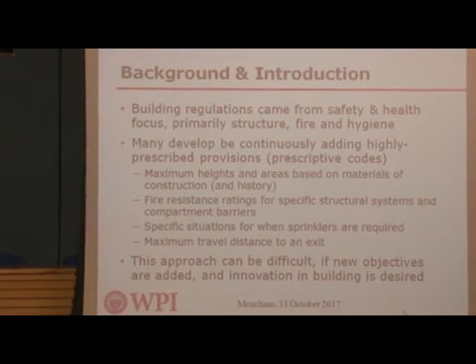So building regulation and fire regulation generally has developed out of the health and safety area because we were very good at burning down cities 100 years ago. So somebody decided maybe we should put in some regulations to try to control for that. And so we instituted a number of measures like limiting the heights of buildings, the areas, compartment size, try to make access easy for the fire service, define how large compartments should be, fire resistance, and we kept adding all of this regulation, and we very much specified everything that needed to occur.

The problem is, in many countries, not all buildings fit that very tight prescription, and it can be difficult to innovate in the design when the regulations are very restrictive. So starting around 1980, there was a movement to transition to what they call performance-based codes. And the idea here is that the regulation focuses on the societal goals like safety in case of fire.

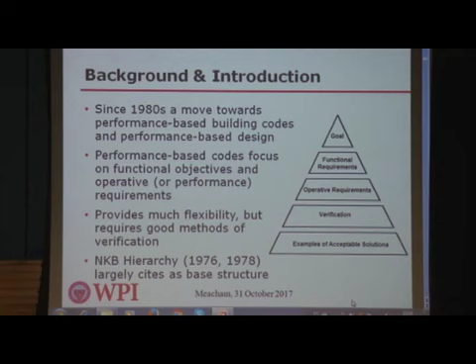You define a functional requirement, something like provide adequate means of escape given the fire protection systems in the building, and then you put operative requirements such that the fire safety systems in the building shall be designed to maintain a tenable environment for the time that it takes people to evacuate. So very clear statements of purpose with some criteria that you're trying to judge, and then you have means to verify through engineering analysis, but then you also have examples of acceptable solutions, which in many cases are what used to be or are still called the prescriptive codes.

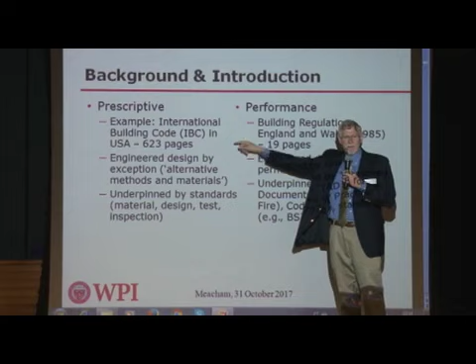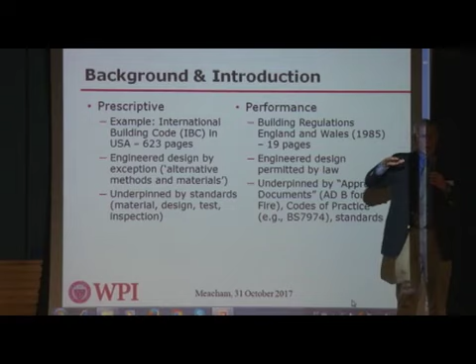And you can see a difference, for example, in the United States, the International Building Code is very prescriptive, 623 pages of text to tell you exactly how many meters to an exit, what the fire resistance is, and it works very well if the building looks like a square box no higher than 4 stories. But with very unique designs, it's very difficult. In England and Wales, the regulation is only 19 pages. It basically just tells you that make the building safe. And so we can do engineered design by exception in the US, but in the UK, it's permitted by law.

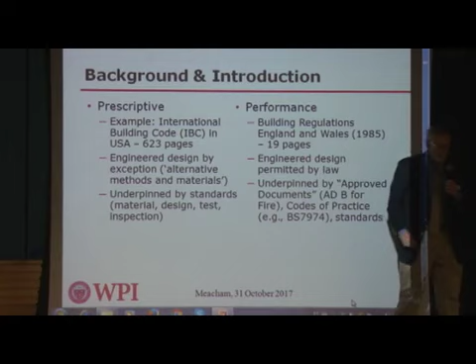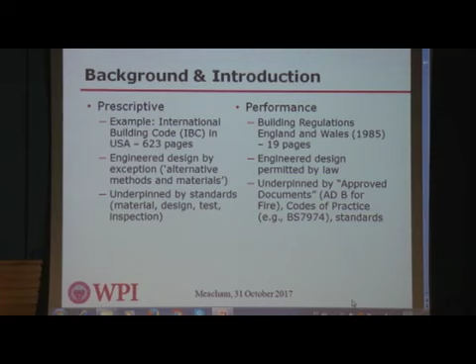And so both sets of regulations are very much underpinned by clear standards for testing of materials, design, and so forth. But it's really an issue of, do you start from telling everybody exactly what they have to do and then allow exceptions, or allow people to do whatever they want and have most people default to the very specific guidance anyway? So that's really kind of the difference between a prescriptive-based system and a performance-based system.

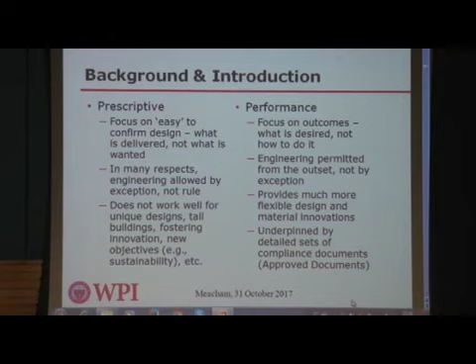And so I say the prescriptive is very good for the regulators because it's easy to determine by looking at the drawings if the design complies with the regulation. And they allow engineering, but it's by exception, and it's a little bit difficult if you want to do a very unique design because not all buildings look like a box. Performance focuses on what you're trying to achieve with the building, not specifically how you do that, and it gives the engineer and the architect more flexibility, but it's very difficult for regulators and the fire service to determine, did the design actually achieve the objectives? So each system has benefits and detriments.

So for the past 2 years, I've been going around the world looking at how, in particular, the performance-based building regulatory systems have been working in 7 different countries. And I've been talking to regulators, fire service, architects, engineers, trying to really get a sense of what is working and what is not working, and what we might want to look at differently into the future. So I'll go through a few of the countries briefly.

I know time is short, so if I start going long, somebody can start waving at me and say stop.

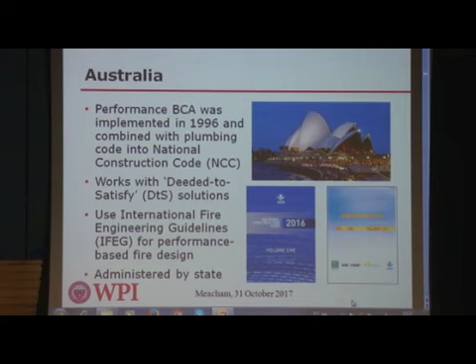But to start with, Australia has the Building Code of Australia, which was implemented in 1996, and that's a performance-based document. And they have this combination of goals and objectives, but they also have a very prescriptive deemed-to-satisfy component. And if you're going to do engineering analysis, they have this document, the International Fire Engineering Guidelines, which lays out a process for how you identify the objectives of the building, how you develop fire scenarios, quantify design fires, conduct analysis for smoke and fire spread, and they even have a fire brigade response model within that International Fire Engineering Guidelines.

So within Australia, fire safety engineers are required for design, but they're only required to be licensed by law in one state. And so this makes it a little bit challenging, because if you don't have the legal infrastructure to define what competencies the engineer should have, that can allow for bad practice in reality.

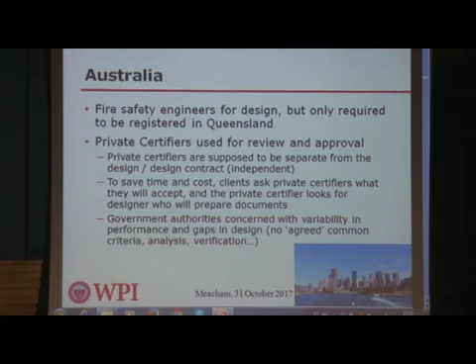Another issue that Australia has is that they allow the use of private certifiers. This means that the government doesn't do the approval like City Hall. A private entity can be contracted to conduct the review and certify the building. In theory, the idea was that it would reduce the cost. In practice, if it's an unethical reviewer, they can pick design engineers that they want to and actually not do a very good design or an appropriate review. So you have to be really careful when you do private certification, because the oversight and the ethics need to be very high.

So we saw earlier a picture of the Grenfell Tower in London that happened just this year. But 3 years ago in Melbourne, Australia, there was the Lacrosse building fire, which had the same combustible exterior facade. They were lucky that no people died in that fire, but the Victoria Building Commission did an audit of 151 buildings and found that 51% did not comply with the building regulations. And they saw this as a potential issue with the private certification and what could happen if you're not careful about having good oversight.

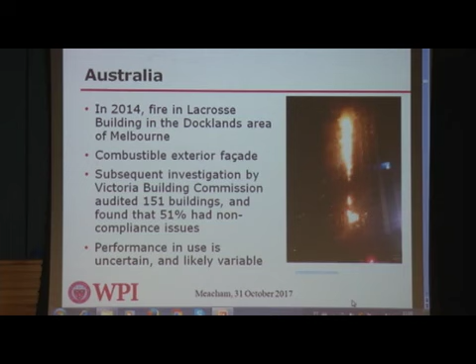So as a result, now, following Grenfell, all across Australia, there's a review of all tall buildings and any buildings with combustible facade, but also trying to determine what is the real expected fire safety performance of the buildings. And the fire safety engineers recognize this, and there's a few comments here.

I hope you'll get the slides so you don't have to try to read everything.

But the engineers recognize that there's no regulations to require building owners to maintain their buildings, to require annual inspections, to make sure that the fire safety management is correct. And so that's an important issue, that you can do a very good design as an architect or engineer, but if the building owner doesn't maintain the building according to the design, then you have no guarantee of the performance expectation.

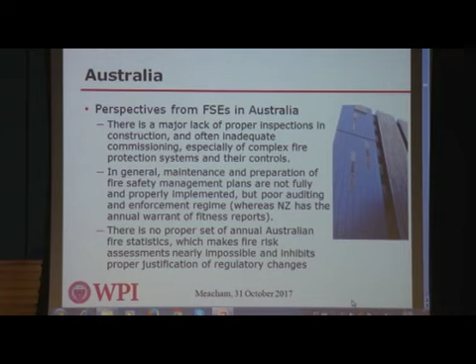Also, Australia does not have a good set of fire statistics. The fire brigade stopped reporting statistics about 10 years ago. It's very difficult to really understand how large the fire safety problem is or what the particular components are without good statistics. So this is something that should change, and in Brazil or any country, you want to know what's happening, because when you have the data, you know where to focus your resources.

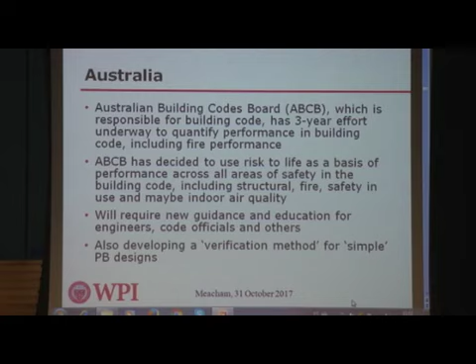So the Australian Building Codes Board, moving forward, is changing their building code. They're keeping it performance-based, but they're setting a single metric of risk to life as the basis for performance. And in the future, fire safety engineers will have to demonstrate that they're not exceeding a particular risk to life level with the combination of materials that they put in the building, and the building owners will have to follow that as well.

So I'll switch now to New Zealand. New Zealand has had a performance-based building regulation since 1992. They also have these fire engineering guidelines, but also recently they developed a verification method which has more detail for fire safety engineers and for reviewers to follow.

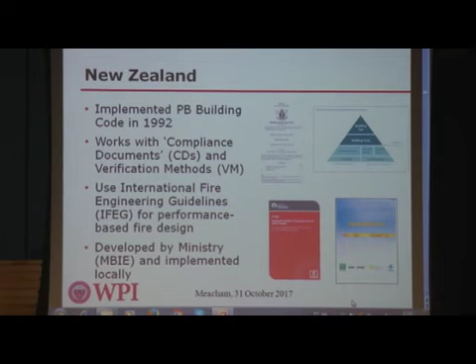So just a little bit of background. In the early 2000s, New Zealand had a very big problem with moisture control in buildings. They had a lot of moisture coming through the exterior facade, causing rot within a lot of the timber construction. That led to about a $2 billion impact on the New Zealand market.

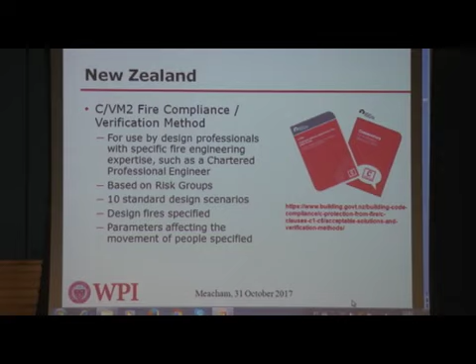So the government changed the regulations and really wanted to focus on better quantification of performance, licensing of professionals, audits of the regulatory authorities, and more to try to get some oversight. As part of this change to more quantification, they developed a fire verification method, based on different risk groups and different building uses, but has defined fire scenarios that the engineer has to use, a defined fire size, and even very specific modeling parameters.

And if you're in an industrial facility, you have to use a 50 megawatt fire. The reason for this is that you're testing the performance of the building and your fire safety design. If you use too small of a fire, you don't get an indication of what could happen if those systems fail.

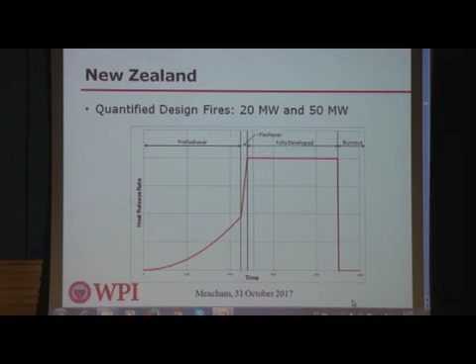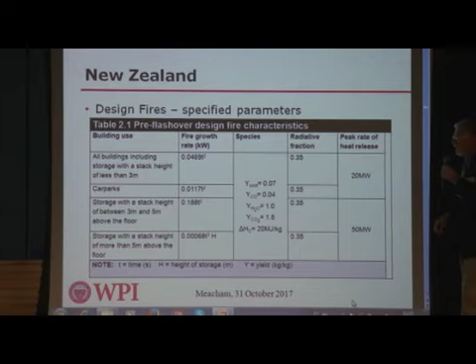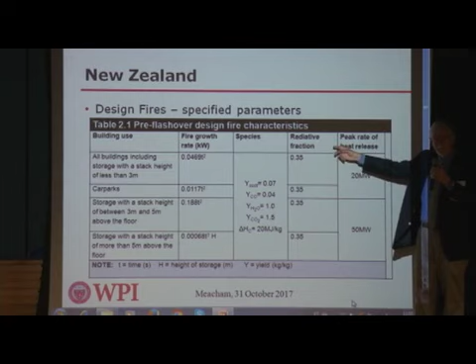Fire safety engineering design also uses quite a bit of computational fire modeling these days. So this design guide is also telling you what the fire growth rate should be, the production of things such as carbon monoxide, carbon dioxide, soot when you're predicting the smoke movement, even things like the radiative fraction, which impact burning rate, and again, the heat release rate.

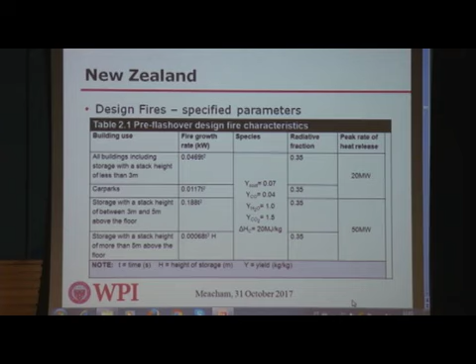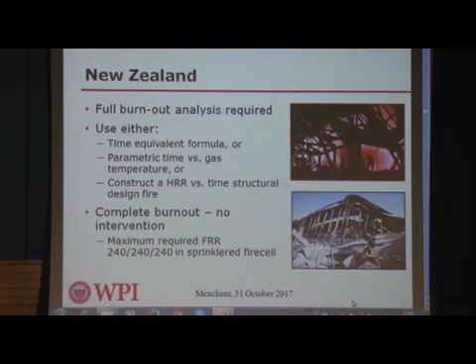So the idea is to be very specific on the load that the building is expected to withstand in the case of fire. For structural analysis, you have to do a full building burnout, showing that the building will withstand the fire based on the analysis, or you have to default to basically a 4-hour fire resistance construction. So it's really intended to put a lot of control in place.

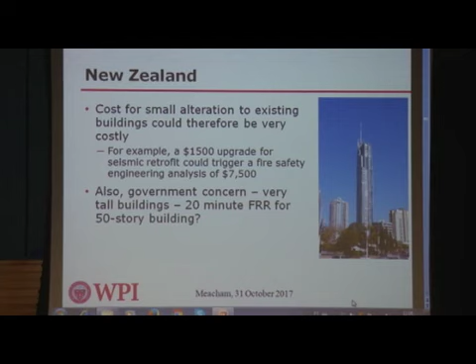Now, some of the industry thought it was too much control, and they pushed back a little bit. So the government has modified it to the point where the verification method is used for most buildings, but if you have a truly unique design, you can do fire engineering from first principles, though it's a much higher review process that you have to go through. They also had some issues with tall buildings, but I'll talk about tall buildings more this afternoon.

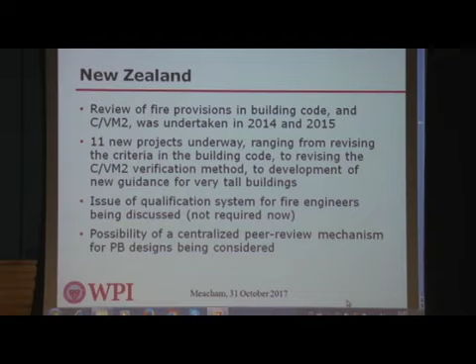So one of the other attributes - the government is doing a lot of work to try to address some of these concerns - but similar to Australia, there's no requirement for a specific fire engineering qualification. They see this as a problem because anybody can call themselves a fire engineer, and the market generally doesn't know how to assess qualifications, so they can get a bad designer. This lack of qualifications is a problem in New Zealand as well as Australia, and they're looking at mechanisms such as licensing, but also a central review body with qualified experts to look at some of these very unique designs to make sure the quality control is much higher.

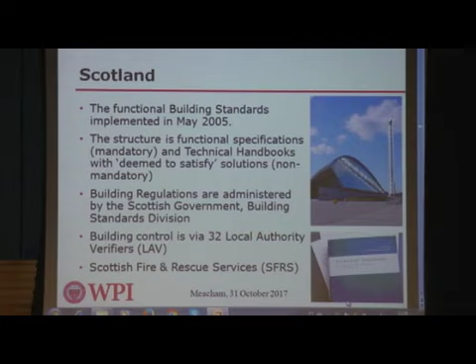Moving on to Scotland. Scotland has what they call a functional building regulatory system, which is essentially the same as performance-based regulation, where they have functional statements in the regulation, and then they have technical handbooks, which are more or less the prescriptive, deemed to comply type of documents.

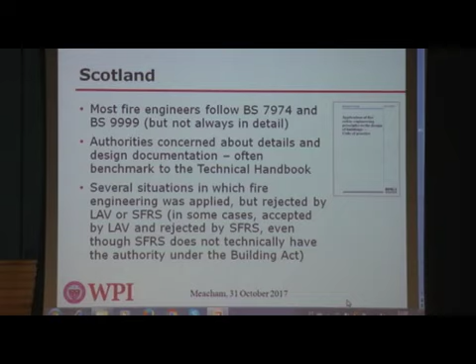For fire engineering analysis, most engineers follow British standards, so BS 7974 and BS 9999. Part of the problem is that BS 7974, in its 8 parts, is very detailed, which is very good. But the authorities are finding that many engineers are not following the guidance in total. They write a statement saying they followed the principles of BS 7974, but when the fire services and building authorities review the design, not all the components are there. So it's really not appropriate to say you're following a specific standard or guidance if you're not following it in total, because it's there as a package to make sure everything works appropriately.

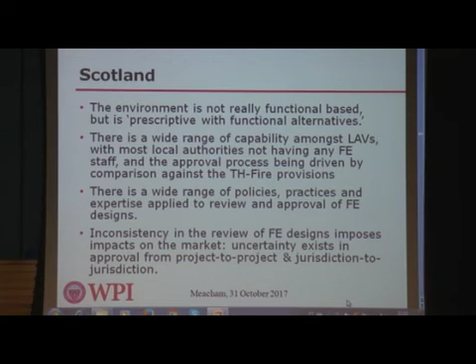So there is some concern that even though the regulatory system is functional or performance-based, it's really being interpreted as prescriptive. Part of this is because local authorities look to the technical handbooks as the first base instead of allowing the engineered design, because they don't fully trust the engineers. So they make the engineers demonstrate the differences to the technical handbooks. Here again, we have this challenge with the qualifications of the engineers, but there's also an issue with having appropriate qualifications for the people reviewing and approving the designs—they need to be at that same level to have confidence that the design is actually meeting the objectives.

So Scotland right now, as a result of some work I did a year ago, is looking at developing a qualification system both for engineers and for local authority verifiers. It's probably going to follow the Institution of Fire Engineers Chartered Engineer status, both for the engineer and the reviewer. But in England and Scotland now, even though you can become a chartered engineer, it's not required by law, and that's the big difference. If a client doesn't understand how to recognize the benefits of a chartered engineer, they may just hire somebody that has inappropriate qualifications.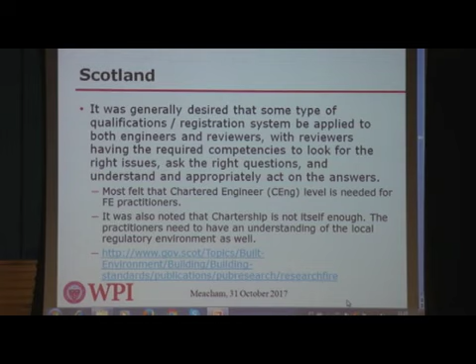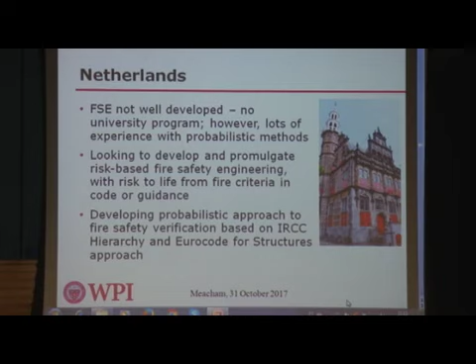The Netherlands has had a performance building code since 1992. They have a large focus on developing innovative solutions, but unfortunately fire safety engineering is not very well developed—there are no university programs in fire safety engineering. They have a lot in civil engineering, since they have this big challenge of keeping the ocean from flooding their country. So the civil engineers are very strong and have done a lot of work with probabilistic methods. Now the fire safety engineers are thinking, because we have all this knowledge on probabilistic design due to flood, can we bring that in to have a probabilistic design for fire safety?

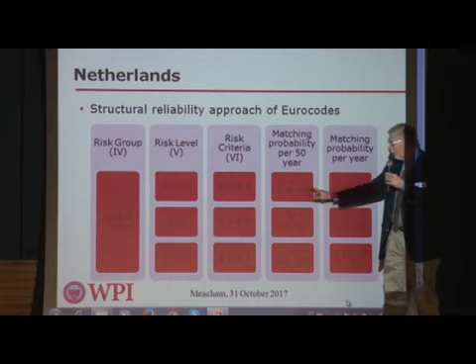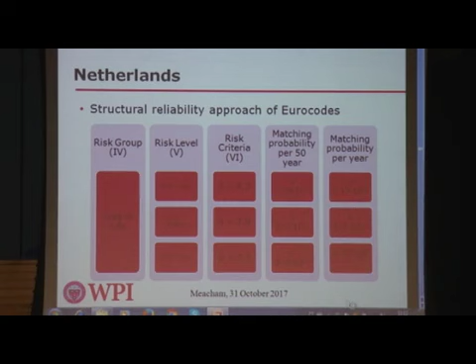So where other countries use more of a deterministic or process approach, in the Netherlands they're looking at following more of a structural reliability or probabilistic approach to design, where the objective focuses on life safety. You have three different risk levels for buildings, and you have a probability of occurrence of event and safety to life that would be the guidelines for the design. This is the current approach they're developing. I'm not so sure they'll implement it anytime soon, but it's a rather interesting approach.

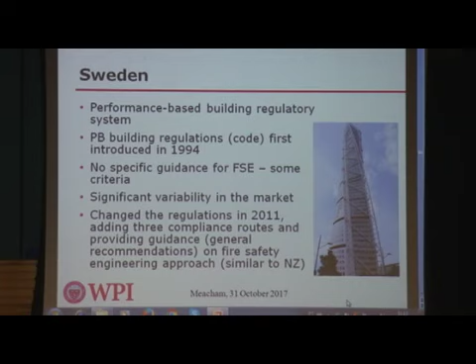Sweden has had a performance-based system since 1994, and with their initial regulations it was very open—it didn't have much guidance, and that caused a lot of problems in the market because there were different interpretations by engineers, regulators, and others. So in 2011, Sweden changed their building regulation and put more specific requirements on design fires as well as acceptance criteria, very similar to what New Zealand did.

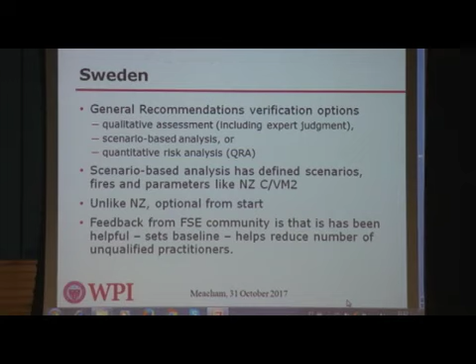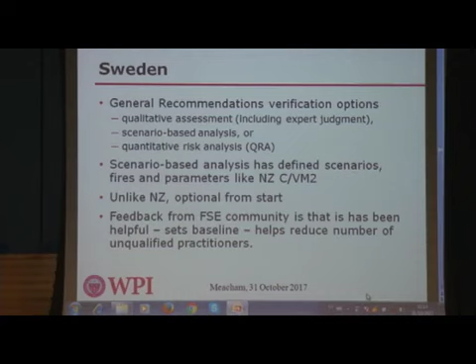There's a document called the General Recommendations, which deals with verification of design, and there are three approaches they allow: a qualitative assessment if it's a very minor design, a scenario-based analysis similar to New Zealand, or a quantitative risk analysis. I'll just talk a little bit about the scenario-based approach. Similar to New Zealand, it gives you fire growth rates that the engineer has to use, heat release rates, and fire load, so you can look at the initial stage, fully burning, and post-flashover fire.

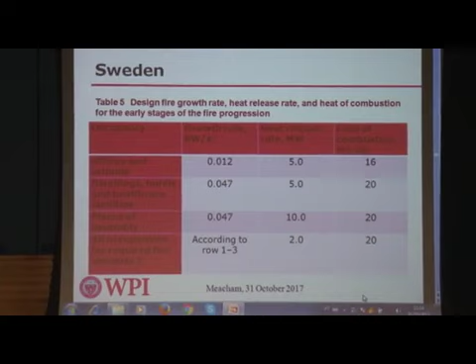What's interesting here is that the heat release rate is 5 megawatts. If you remember, it was 20 megawatts in New Zealand. So there's a different philosophy in terms of what the size of the fire should be for testing the building. If you look to develop a design guide, that would be one of the big factors that needs to be looked at.

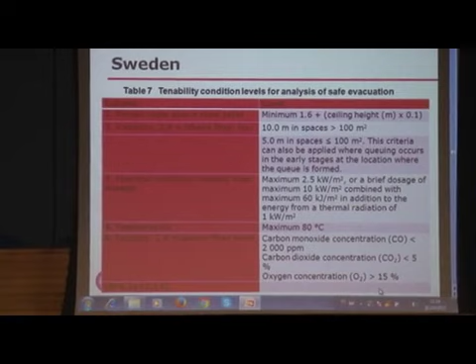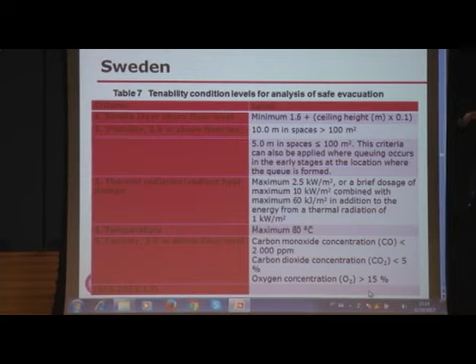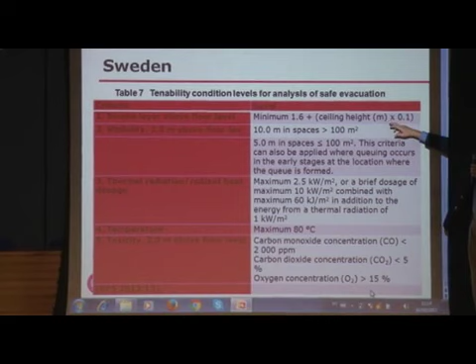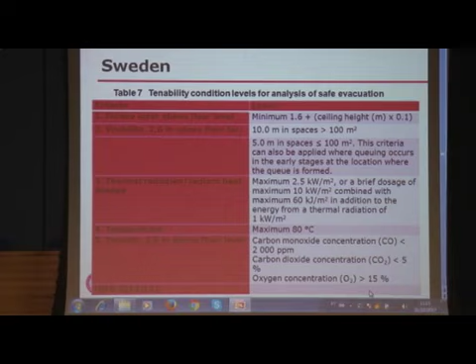Here's an example of some of the criteria they use. There's a defined smoke layer above the floor—you have to have at least 1.6 meters of clear height, plus 0.1 of the height of the ceiling, so as the ceiling height adjusts, that level adjusts. There are different visibility requirements: 10 meters in a large space, 5 meters in a smaller space, maximum radiant heat flux that people would feel on their skin, and things like that. But it's very good if you're going to do modeling, to be able to demonstrate what you think the fire is actually going to do in terms of impacting people as well as impacting the building.

So some of the observations from the engineers were that the change in guidance has been very helpful, but they see another problem. Sweden has a very long history of fire safety education—Lund University has been graduating fire safety engineers for about 25 years.

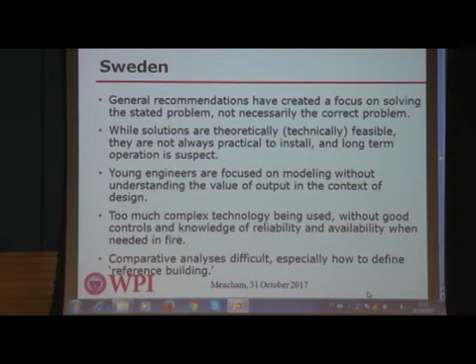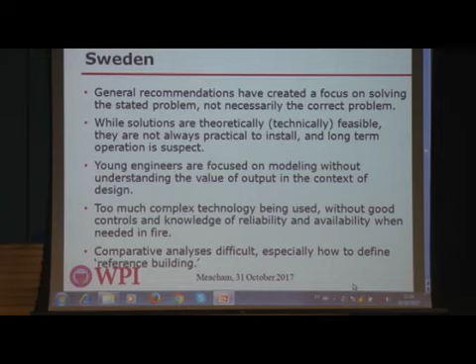So the problem that some of the engineers, particularly the older engineers, are seeing is that the young engineers are very good with computer modeling, but they have no idea how to engineer a good design. They're used to computers because they play computer games, but they don't understand how to interpret the output in relation to what makes a reasonable design, and they come up with impractical designs. So here's a case where technology, which can be very helpful if not properly applied, can end up with a design that's even worse. So there needs to be some controls.

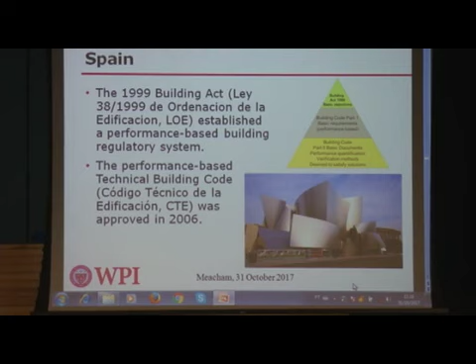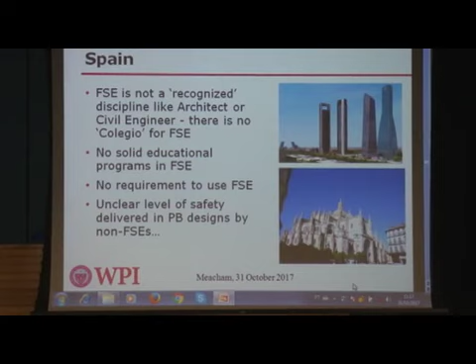Briefly on Spain, they have a performance building code as well. The Building Act was initiated in 1999, and the technical building code was published in 2006. A problem there, which as I understand is a similar challenge here, is that fire safety engineering is not recognized like architecture or civil engineering. There are no fire safety engineering programs, and there's no requirement to use fire safety engineering. So they implemented a performance regulation, but they didn't have any fire safety engineers qualified to do it. So it's a rather mixed up kind of place.

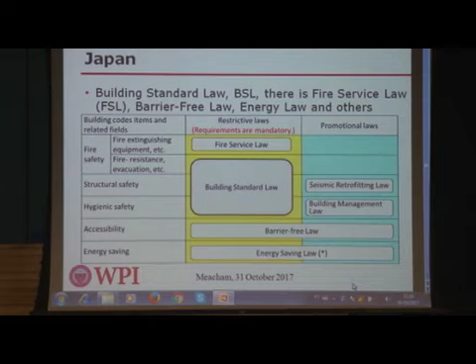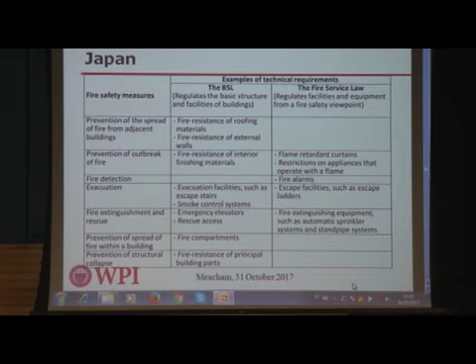Then briefly on Japan. Japan is different from the other countries I looked at in that they have separate building regulation and fire regulation: the building standard law and the fire service law. The fire safety requirements are split between the two regulations. In the building standard law, you get things such as structural safety in case of fire and evacuation. The fire service law deals with active systems such as sprinklers and detection systems. So that requires a lot of coordination between the building regulators and the fire service, because you have to look at both sets of regulations depending on what aspect of building fire safety you're controlling for. If you're dealing with fire resistance, smoke control, and evacuation, that's building standards law. If you're talking about sprinkler systems, detection, communication, and fire service support systems, that's the fire service law. So in a design, all of that has to be very well coordinated, which doesn't always work.

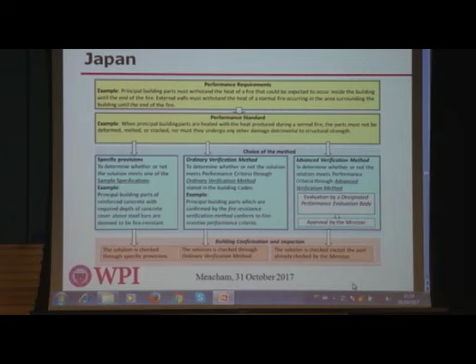The other aspect about Japan is that they have 3 different methods for verification. One is that you can just follow the prescriptive option in the code. The second is what's called the ordinary verification method, which has very specific relationships between smoke filling and evacuation, or specific requirements for structural engineering design. Or you could go to a full performance-based design. If you take that last route, you have to submit your design to a panel of experts, put together through the ministry and approved bodies, who will do a complete review of the design. That panel is typically academics and researchers.

So a short summary of Japan: they have a performance code, and what I call the medium level verification method, but that's all based on kind of 2-zone models and simple equations. If you want to do a full performance design, you have to get ministerial approval, but it's difficult to get that approval. So there are a variety of challenges, and with that long time to approval, fewer people do the full performance design because of the uncertainty in the end.

I know I'm going quickly, but I'm trying to get everything in here a little bit. One other thing I did after going to the countries was to post a survey online through SurveyMonkey. I asked engineers around the world - I had a few engineers respond from Brazil, and 400 respondents in total. Most of the people were from Australia, New Zealand, Sweden, Scotland, the US, and Spain, because those were the countries I visited.

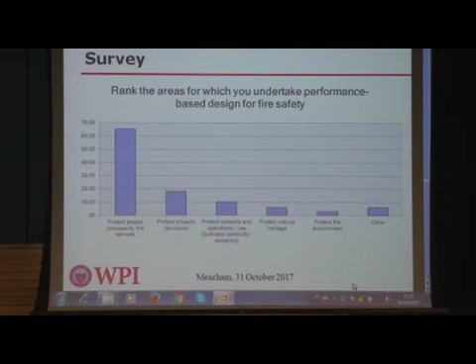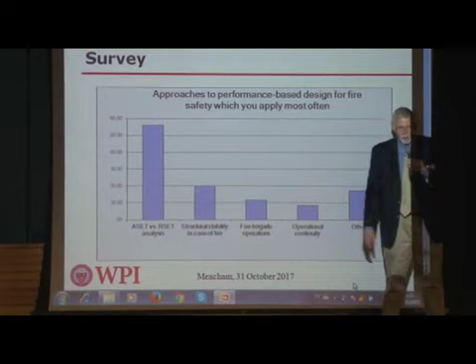If we look at where people are doing actual fire safety engineering - I know it's difficult to read - the first bar is to protect people. So life safety analysis was the primary means for doing fire engineering, and the second primary area was property protection or structural protection. If you look at the methodologies people use, since it was primarily life safety, the most common is what we call ASET/RSET - available safe egress time compared to required safe egress time - with the second most common analysis being around structural stability in case of fire. It was also interesting to see a fair number of analyses related to the fire brigade.

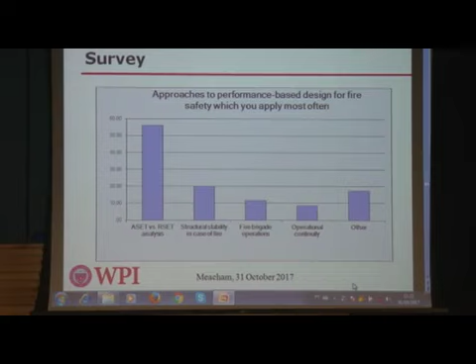This is important because in many countries there's a requirement not only to protect the safety of the occupants, but to provide reasonable protection to the fire service while they undertake rescue and suppression activities. That's where structural stability and fire brigade operations analysis becomes important, because you can't just design the building with enough time to get the occupants out and then let it collapse on the fire service. You have to design the building to allow the fire service to undertake their operations. I think that's a very good part built into some countries that is really important to consider.

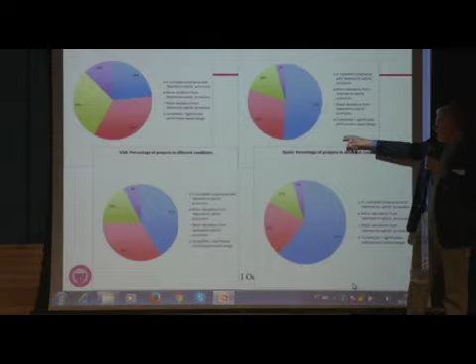I apologize, this is impossible to read in detail, but the next few slides show percentages of different aspects of design across countries, asking what way you mostly undertake your design. The blue is compliance with the prescriptive or deemed-to-comply approach, and the purple is more performance-based. You can see in Spain it's mostly prescriptive, in Scotland as well. Looking at the green and purple, in the US and Australia much more engineering analysis is undertaken.

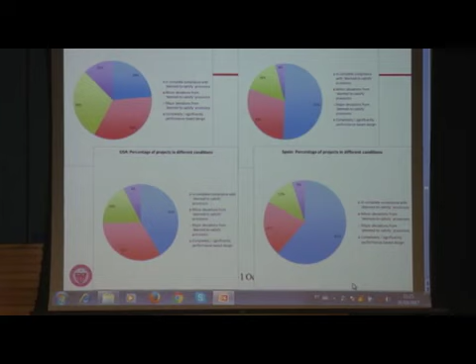Some of this is a function of qualifications. If you don't have requirements for qualifications of engineers and all the support mechanisms, even if you have that type of regulatory system, you can't work with it. You have to put everything into place if you want to have this type of approach.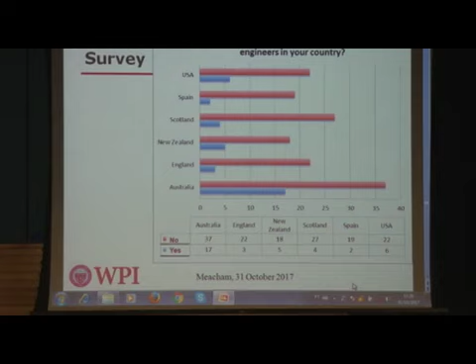These are just some breakdowns about whether or not you have enough qualified engineers. And in all countries, even the US, where we've had fire safety engineers for 50 years, we don't have the capacity to meet the demand of the market, both in design and in fire service and building control.

The disturbing part is that about 75% of respondents think that non-qualified people are undertaking fire engineering designs. This is the problem when you don't have a good qualification system, because that type of situation leads to buildings with problems like Grenfell and others. If you don't have the right qualified people doing designs and review, and you don't have a good fire safety management culture, you can get into very difficult challenges.

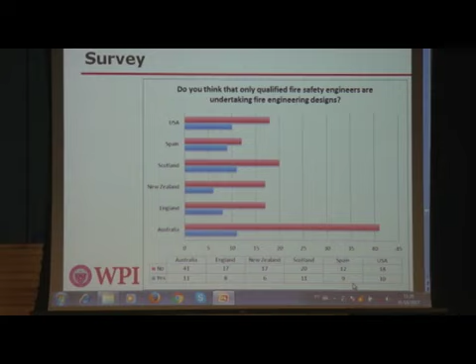So here the US thinks they're doing a little bit better. Australia is really concerned about how many unqualified people are undertaking designs, at least in the determination of the market.

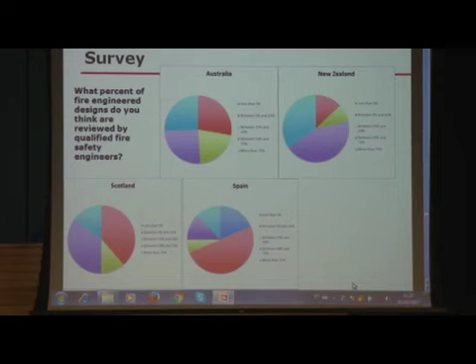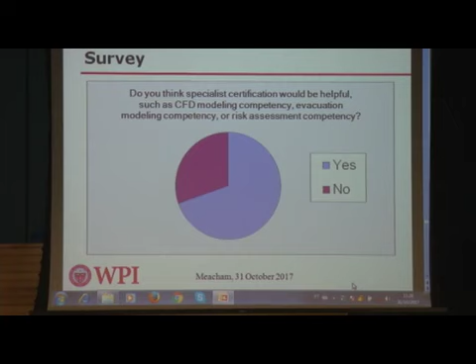This is the last survey question. Across all countries, a large majority of people think that specialty certification for things such as computational fluid dynamics modeling, finite element analysis modeling, and evacuation modeling is required, because just because you get an engineering degree doesn't mean you know how to properly run a model in a fire environment. So having specialized certification to enhance the education is important.

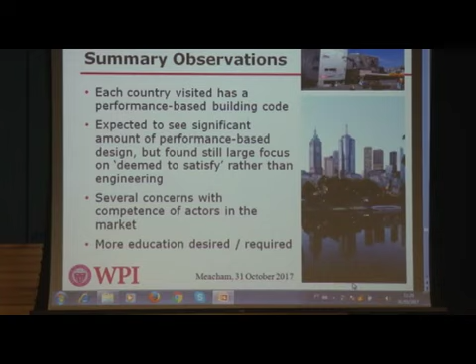So a few summary observations. Every country I went to has had a performance-based building regulatory system for a number of years. I expected to see a lot of performance-based design being done, but mostly it was still following the prescriptive or deemed to satisfy solution. And a large part of that was that the market didn't think they had enough qualifications, and there's not enough educational programs to develop competent engineers and practitioners.

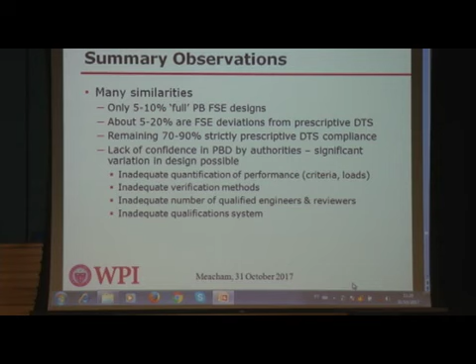So across all countries, somewhere in the range of 5 to 10% are performance-based fire safety engineering design. Maybe around 5 to 20% are deviations from the prescriptive requirement, and 70 to 90% of the time, they're just following the prescriptive code. And there's a lot of reasons for that: inadequate measures in the code, but inadequate number of engineers and reviewers, and a not very good review process.

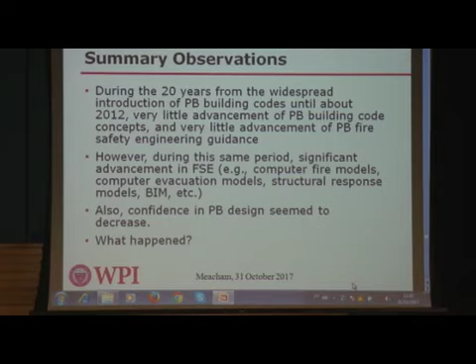So I kind of asked myself, if we've had performance-based regulations for 20 or more years, how can we haven't advanced further with fire safety engineering and the performance concept? We have the performance, but it's not quantified. So if you don't have clear quantification of the acceptance criteria, the scenarios, and the fire, it's hard to design. That gets more complicated when you don't have the qualification systems for the engineers. And if you don't have the education to qualify the engineers, then you just have a really big problem.

So for some of the countries that have had the situation for a number of years, I find this graphic from the technology industry very interesting. Basically what this says is that some type of new technology or innovation occurs, and everybody jumps on the bandwagon. Everybody wants to use it. Performance-based design is great, we're going to adopt it. And then you start to find out what it actually takes to do that. You start to get disillusioned with the actual time it takes, the cost, the recognition, and so forth. So you fall into this trough of disillusionment.

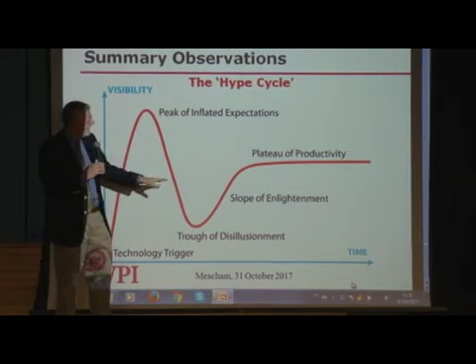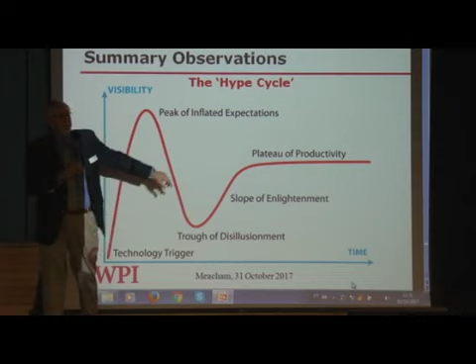And then you have to kind of claw your way up the slope of enlightenment when you find out how much infrastructure you have to put in for education, training, competency, certification, until you get to a level where you're working productively. So I think we are now, in many countries, kind of moving up to a steady state, but it's taken many years to really determine all the shortcomings and how much infrastructure and education and training is needed to make the system work effectively.

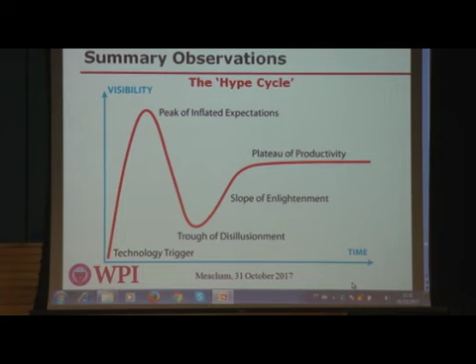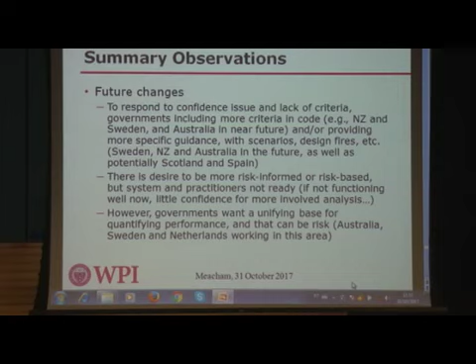So moving forward, many countries are taking steps to add more quantification into their performance codes to help deal with these issues. They're trying to get more guidance around the qualifications of the practitioners in the market. What is the minimum? How should licensing happen? How do we determine competent participants? Some of the more progressive countries are trying to go further and say, we're worried about risk to life. We'll make that the fundamental unifying criteria.

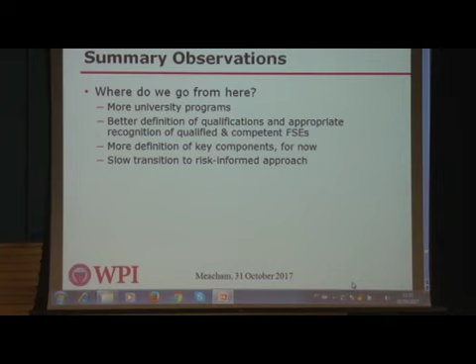So that's just going to mean more education is required as we move along. Going forward, for me, it's very clear we need more university programs producing people at all levels, engineers, qualified technicians, authorities that understand the concepts and how the engineering works together. We need better definition of the qualifications and competencies of fire safety engineers and what their expectations are relative to building design. And we need to define all of these components so that I have the same interpretation as everyone else to avoid confusion. I think eventually we'll go to more risk-based methods, but that's probably another generational shift.